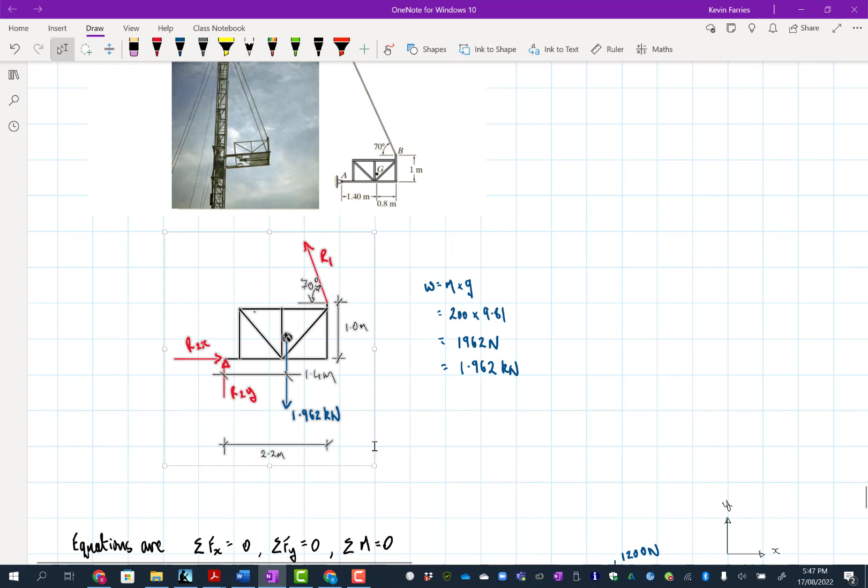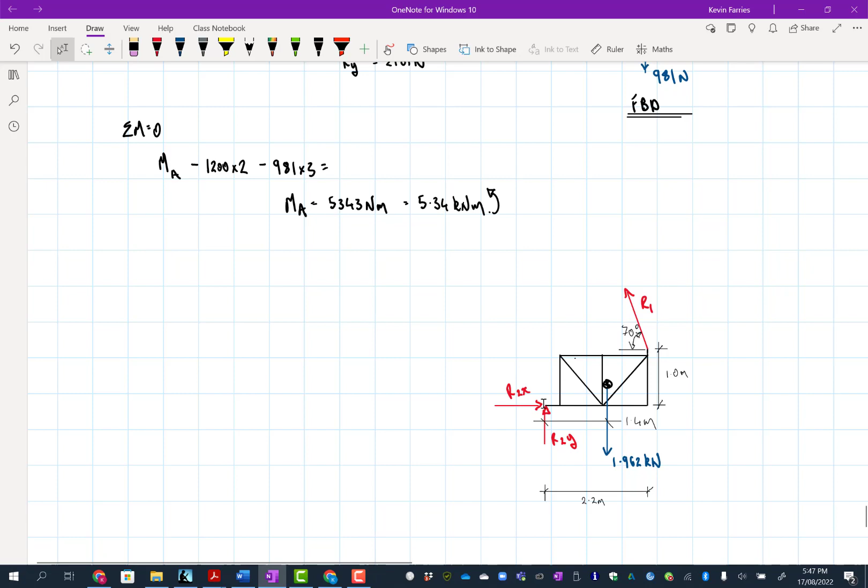So we've got the reactions, and I'm just keeping in mind what I was talking about before: this is the total weight, so this is the total reaction at that point. If they'd asked me for the tension in the cables, I'd need to remember to divide that by 2. And if they'd asked me for the reaction at one of these connections, let me go back up here and show you. So there's 2 cables. Similarly for the connections, there's 2 connections, but I've used the whole weight. So if I was asked for the forces at one of the connections, I'd have to divide that by 2.

Right, so same again. We'll start off just doing the X and Y components. And if I'm going to do that, I'm going to have to figure out what the X and Y components are of this force. So we don't have that at the moment. I might just have to move that angle out of the way. How annoying. Come on, there you go. I'm doing it in grey because I've already used all the other colours. So let me just do that.

So I need the components of this. I might have to move this as well. I just want to be careful, when I'm doing these, to draw the components at the right point of application so I don't get confused about the moment that they're imposing. So what have we got? R1Y, R1X, and I've drawn that a little bit too long. Let me better fix it.

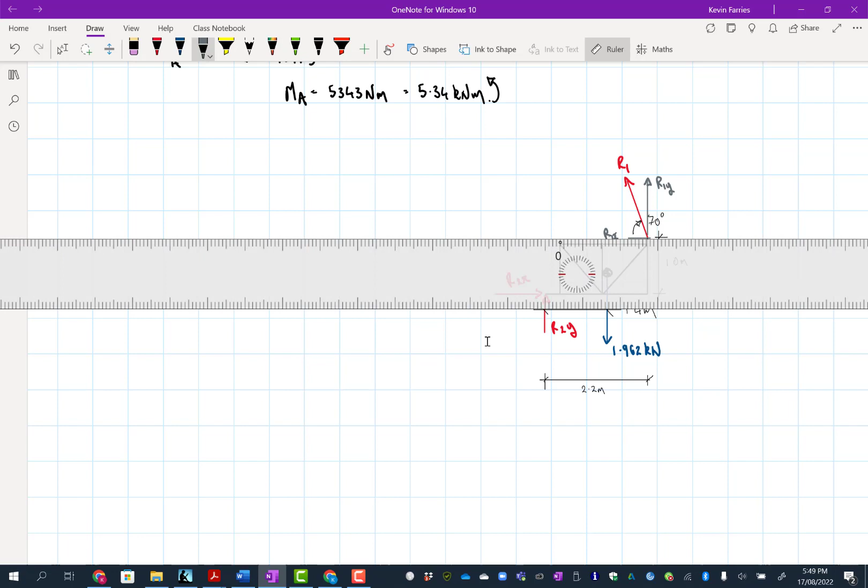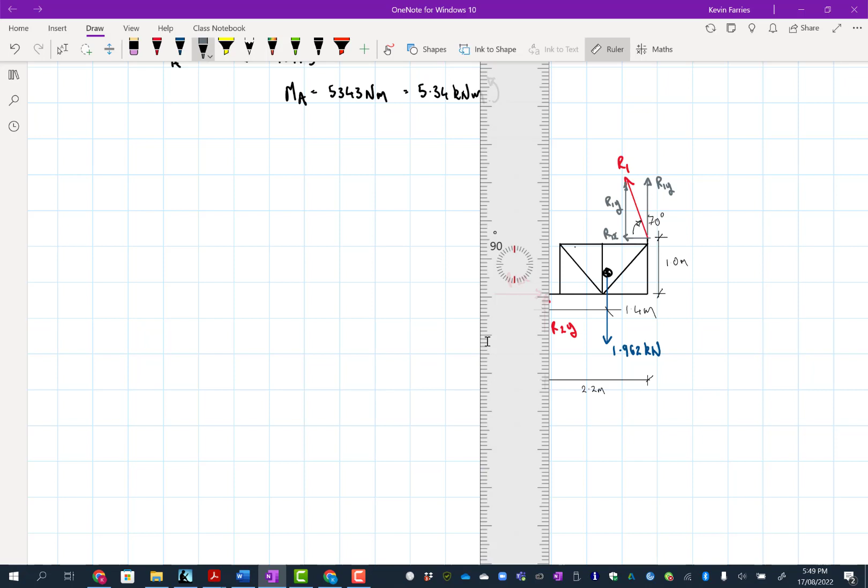So, went a bit too far, so it's about there. That was R1X, then up this way we've got R1Y. Right, and looking at this, X is in the negative direction, just keeping that in my mind. So therefore, we'll calculate the X and Y components of this force. I'll just speed through that. I'll get you on the other side.

So I have got myself those components. I don't know if you'd have to do that. You might be able to just say R1X and R1Y. I found them in terms of R1 itself, but let's just push on through and we'll figure out what we need to do as we go along. We don't know R1, so I can't get these down to a number. They're just ending up being a formula or an equation. And we'll go a little bit further and see if I actually needed to do that or not.

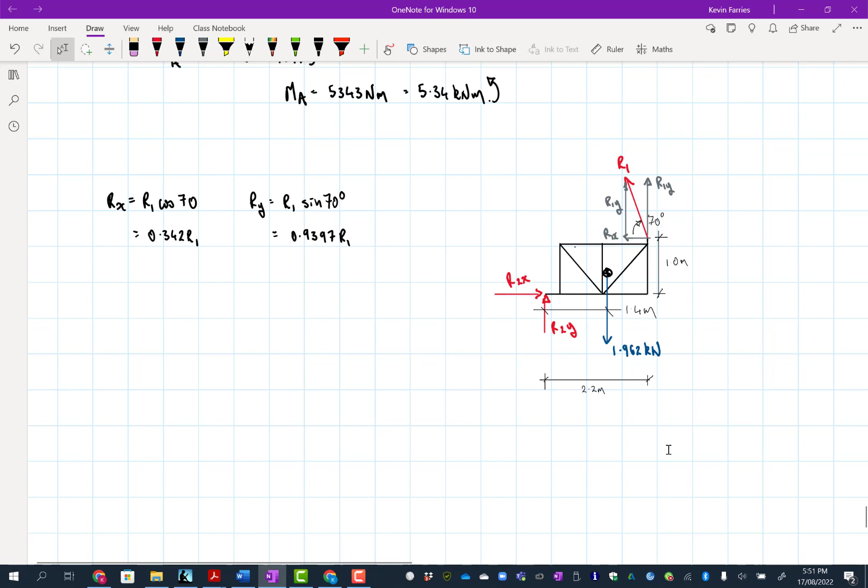So let's try and do, I don't know what I want to do first here. So we've got R1 here, so let's just try something and see. I once tutored a student, and the one thing she needed to know to get up and running with maths... Oh, let's not use OneNote for a start. Let me just figure that out, right? Oh, why?

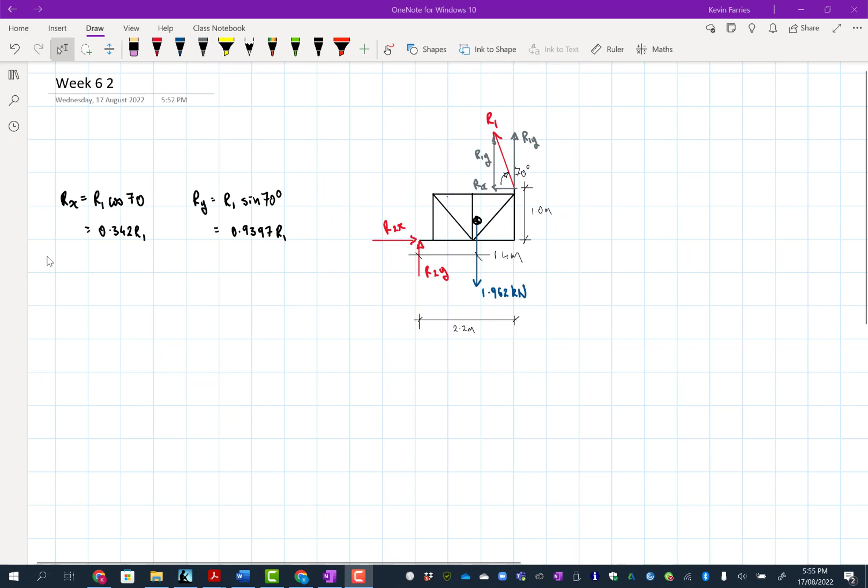Okay, let me pause. It was that you don't need to know what to do next. Sometimes you just need to try stuff and see what happens, and then you'll usually figure it out after that. So it's not necessarily the case that you're going to know exactly what to do for the next step. Sometimes you just have to try what you think might work, and from there you'll usually figure out what you do need to do.

Anyway, let's start off with the X components of force. The sum of the X components must be equal to 0. So what does that tell us? Now let's get the directions right. R1X is negative, so that's going in the negative direction. I probably should have put that here, but as long as you get it right in the equation at the end of the day. So this should really have been minus 0.342 R1.

This should be R1X, this should be R1Y. R1Y is going in the positive direction, so from now on we're just going to use these in their standard directions, so that's going to be X and Y that way. So that's positive, so that one's okay. So let's come back again to here now.

So sum of Fx is equal to 0. So that means that R2x is positive. So R2x, and what other x's have I got? Minus R1x. I think that's the only other x I've got, the x associated with this. So it turns out I chose the right one after all. So, oh sorry, take away, so it's the negative direction, take away R1x is equal to 0. Therefore, maybe it doesn't help much, R2x equals R1x.

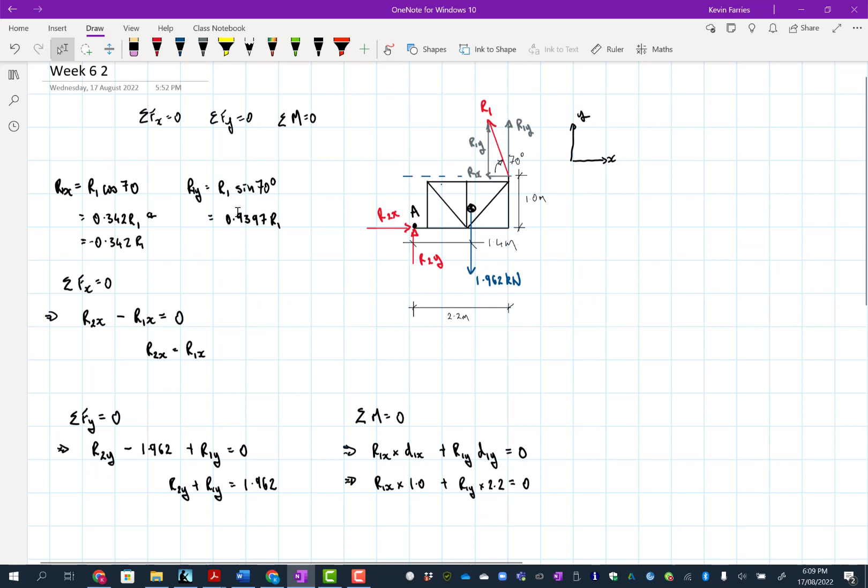And you might hear that I'm cheering up a bit because I think I can solve this now. We've got an equation with 2 variables, so we wouldn't be able to solve that. However, we've got a rule to reduce it down to 1 equation. We've figured out R1x and R1y up here already. Another thing we could have done would be to find the lever arm to that, but it's going to be finicky to get that, or is it? Not really. No, it is. Sorry, just thinking about different options.

So where are we here? We've tried all 3 of the equations we've got available. I tried the wrong 2 first, but this third one is promising because I've got 2 variables, but I can reduce those down to 1 variable using these equations. Okay. Now, I've already thought about the direction of this, so I'm not going to worry about the fact that this is negative. So that's going to mean

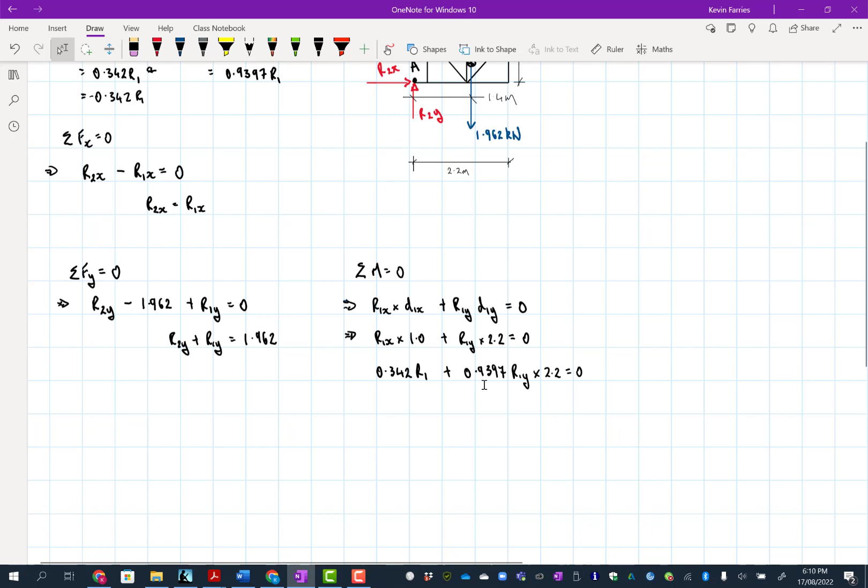0.342 R1, and then it's just times 1, so it stays the same. That's from substituting in R1x equals R1 cos 70, which ends up being this. And then we've got R1y equal to 0.9397 times R1, multiplied by 2.2, equals 0. So we can just work all that out now, can we? So we just end up with R1, everything equals 0.

Spot the idiot. What have I missed? The sum of the moments is equal to 0. I've done these moments. What have I forgotten? I've forgotten the weight also makes a moment about that point. You've got that force going down, with a lever arm of 1.4 meters. That's the perpendicular distance. So we need to stick that in the equation as well. Positive or negative? It's going clockwise, so it's negative.

Negative 1.962 is equal to 0, so that's equal to 1.962. Let's figure what that is. We've got 0.342 plus 0.9397 times 2.2. So that's 2.409 to 4 significant figures, because we might have to use it again. That one's not R1y, it's just R1. Okay, so I substituted this into here.

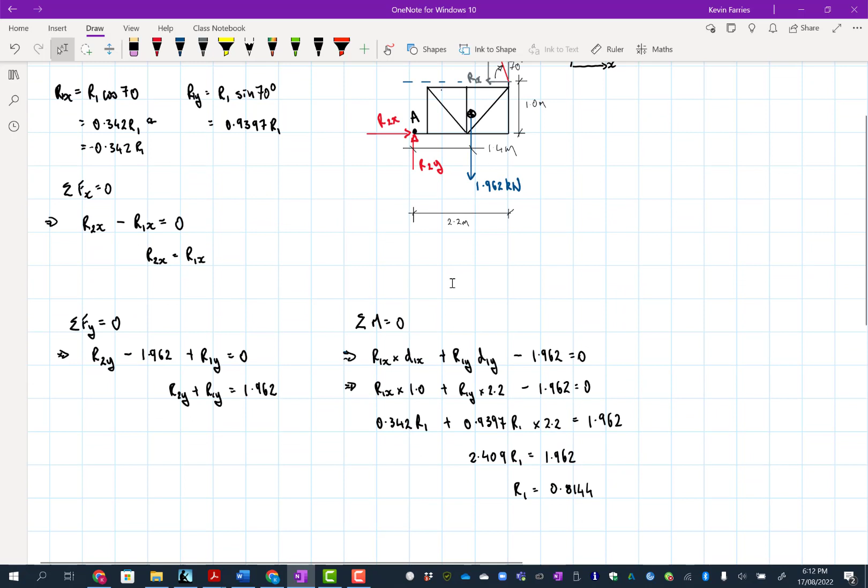So 2.409 R1 is equal to 1.962. Therefore, R1 is equal to 1.962 divided by 2.409, which is equal to 0.8144. I don't want to stop doing this because I think it's useful for you to see the process can be a bit bumpy to get to the right answer.

I don't know exactly what I'm doing right to the end. I'm just trying different things to see what works. And so if I'd been smarter, I could have figured that out to start with, that I'd need to use this one here, but I wasn't, so I couldn't. So I just started figuring out some different stuff, see what works, then look at the 3 equations, see if I can figure it out.

So I now know what R1 is equal to. That means I can figure out R1x and R1y. Once I've got those components, it should be pretty straightforward to substitute those into here, and we'll get our answer. Yep. So therefore, R1x is just going to be equal to, well, here's our formula up here. R1x is equal to R1 cos 70, so it's 0.342 times R1, and it's in the negative direction.

It's negative direction, that makes sense. So negative 0.342. Is that right? Just check that, cos 70. I'm just checking that I haven't forgotten to round it. No, it was 0.3420 times R1, which is equal to, so we've found out R1 now, so it's minus 0.3420 times 0.8144, which is equal to minus 0.2785.

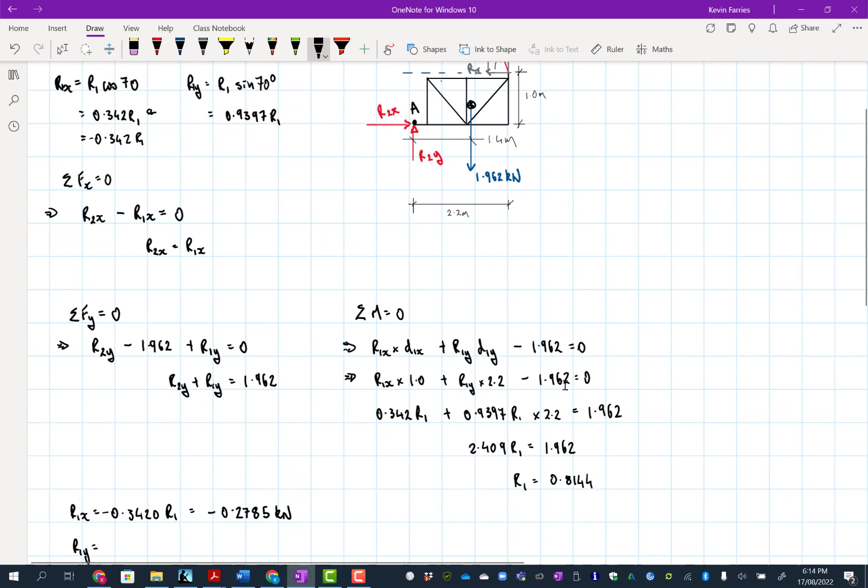And what were we in here? Kilonewtons. Maybe should have kept it in newtons actually. Too late now. And then R1y is equal to, so it was this one up here, it was just sine 70. I'll just check that again, just to make sure I've got that right. Yep, 0.9397 is correct, and it's positive, so it's 0.9397 times 0.8144 is what R1 is from over here.

Times 0.8144 equals 0.7653 kilonewtons. Or we could have said 765 newtons, something like that. It might be better to change this back. So it's equal to 278.5 newtons, and this is equal to 765.3 newtons. R1y and R1x done.

Therefore, we can now figure out what these are. And so R1x, that's going backwards that way. The only other x we've got is R2x, so it's going the other way. So R2x is just equal to, oh, I've lost a negative. And so therefore, R2x is equal to 278.5 newtons just from this equation up here. Where were we? Yeah, and R2x is going in the positive direction. So R2x is in the positive direction, that's okay.

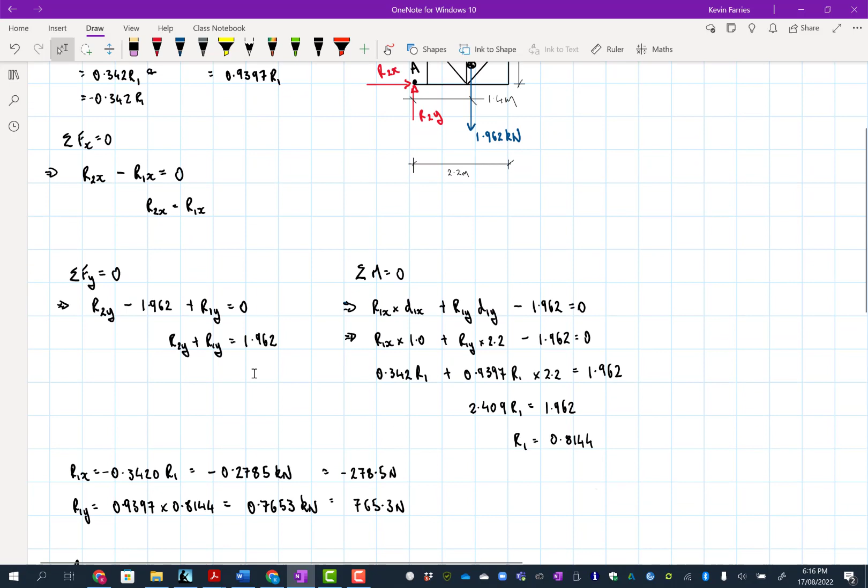And now the last thing we need to get is R2y. How on earth are we going to get that? Well, R2y plus R1y is equal to 1.962. So therefore we've got R2y plus R1y equals 1.962. And we know R1y, that's it here. Oh, that's kilonewtons, so let's change that to newtons since we're putting everything back into newtons. 1962 newtons. So therefore, R2y is equal to 1962 newtons take away R1y, 765.3 newtons.

Which is equal to 1962 take away 765.3, is equal to 1197 newtons. So reactions are: R1x is equal to negative 278.5 newtons. R1y is equal to 765.3 newtons. And that means that, we could just say R1 is probably what they might be looking for,

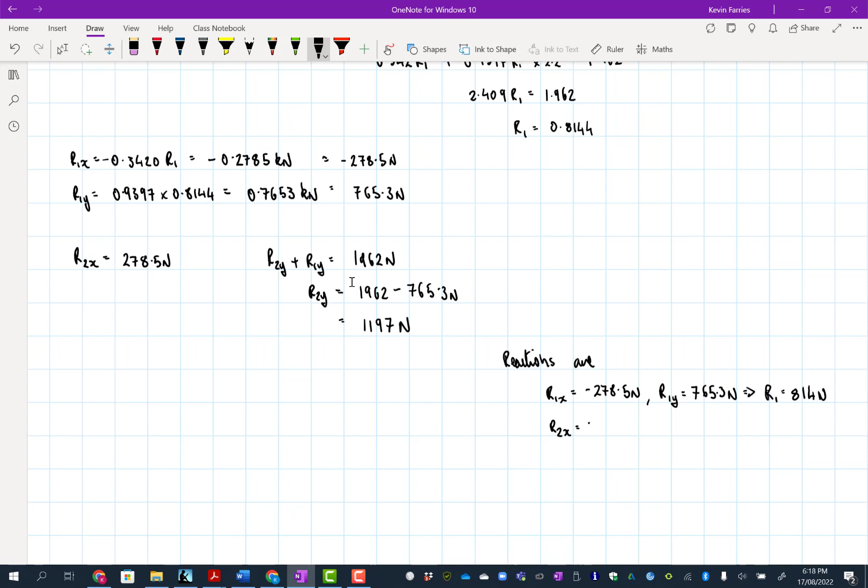0.8144, oh, sorry, change it to newtons, so just equal to 814 newtons. R2x is equal to 278.5 newtons. And R2y is equal to 1197 newtons. And that's got all the answers, so you just say as per above sketch. Wow, that was a monster. And no doubt I've made a mistake in there somewhere. You can let me know where it is.

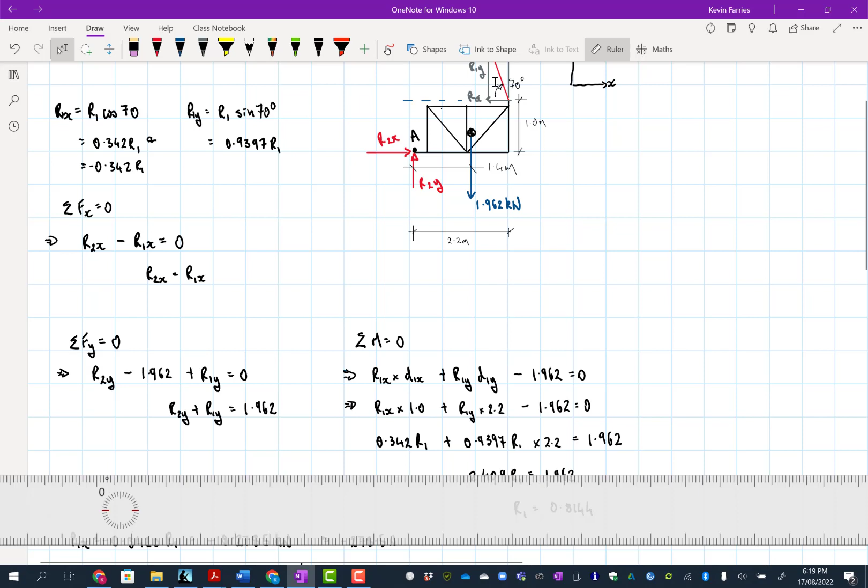Let's go back through really quickly because it was such a prolonged process. I just tried different things to see if I could figure out all these forces. In the end, I should have realized to start with, but it was the sum of the moments that got me to an answer. But I did need to do this as well. So I figured out the sum of the moments, and then I realized I can get that down to one variable because I can write R1x and R1y both in terms of R1. And so then I could solve that for R1.

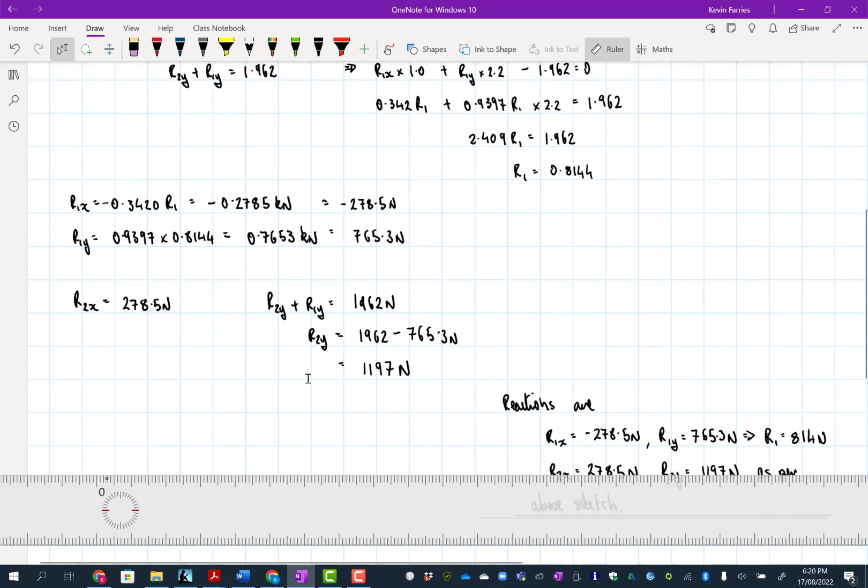Then I could figure out the x and y components of R1 because I know that angle, so I can just use trig. In fact, I'd already got those equations up here. Once I knew that, I had my equations already from here and here that would let me figure out R2x and R2y once I knew R1x and R1y, and so we got ourselves to a solution for everything. Phew.